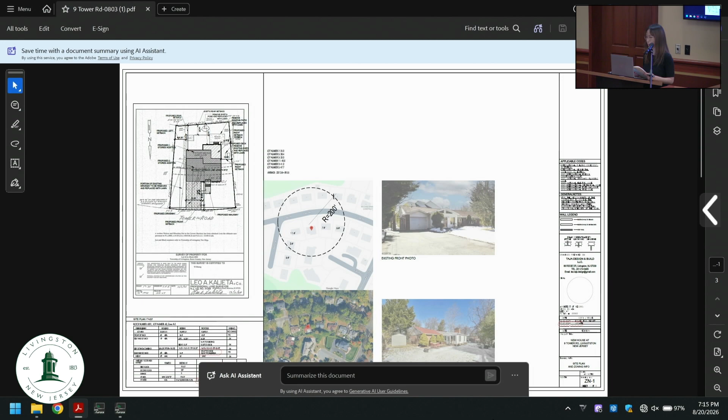Good evening, Chairman and board members. Tonight I'm pleased to present our revised proposal based on comments we received from the board in June. We are seeking a total of 4 variances: 1 habitable floor area ratio variance and 3 setback variances. Let me zoom in to the site survey.

First is the habitable floor area ratio variance. The revised proposal reduces the habitable floor area from 3,548 square feet in June to the current 3,229 square feet. The proposed ratio has been reduced from 32.6% to 29.65%. The massing footprint and deck area have also been reduced in the current design.

The remaining 3 variances relate to the setbacks. First is the front yard setback: required is 60 feet, and we are proposing 40 feet, requiring a variance of 20 feet. Second is the right side yard setback: required is 15 feet. The building itself complies, however the deck is proposed at 13.25 feet, requiring a minor variance of 1.75 feet. This limited relief will allow the owner to let the deck align with the east facade of the house.

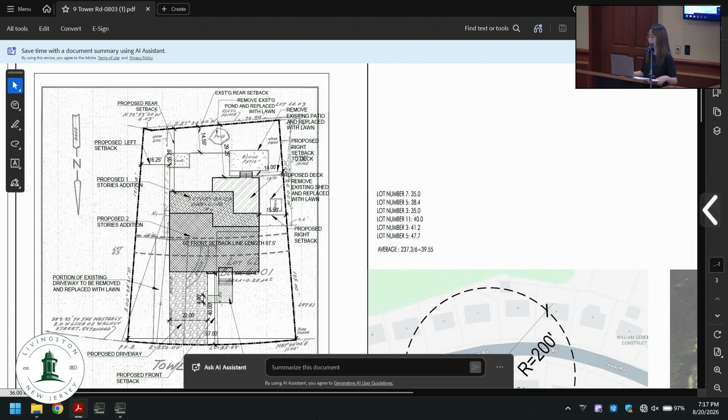Thank you. Does the board have any questions for this witness? Does anybody in the public have any questions for this witness? Does anybody in the public want to make a statement regarding this application?

I'll make a quick statement: thank you very much for taking our suggestions into consideration and redesigning the house. I think this is much better. Thank you. Does anybody have any statements on the board? I'll concur.

Would anybody like to make a motion? I'll make a motion to approve. I'll second. Mr. Sherman? Yes. Ms. Yuan? Yes. Mr. Horn? Yes. Mr. Shah? Yes. Mr. Weissman? Yes. Ms. Khan votes yes. Mr. Beer? Yes. Congratulations, thank you very much.

Thank you, okay, let's call the next application.

Block 1506, Lot 42, 26 Crestview Hill Road, application number 2026-59-V, Rodak Homes Inc. Applicant seeks approval for a new single-family house in violation of the following sections: 170-99C2, front yard setback, 40 feet required, 33.8 feet proposed, 6.2 feet variance requested; 170-87CC4, habitable floor area ratio, 30% allowed, 35% proposed, 5% variance requested.

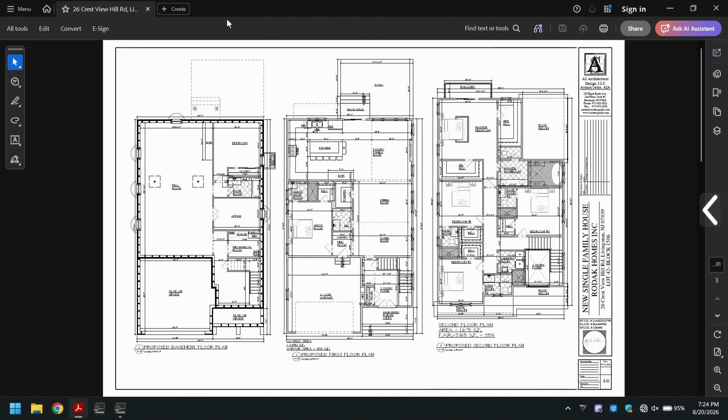Okay, does someone want to make a motion? I'll make a motion to approve. I'll second it.

Mr. Horn? Yes. Mr. Sherman? Yes. Mr. Shah? Yes. Ms. Yuan? Yes. Mr. Weissman? Yes. Ms. Khan votes yes. Mr. Beer? Yes. Thank you for your time. Thank you, board.

Stay dry. I know. It's actually going to be nice. That house needs a change.

Block 7500, Lot 8, 27 Cornell Drive, application number 2026-29-V. Utkarsh Patel, Purvi Sharma, and Srijith N.

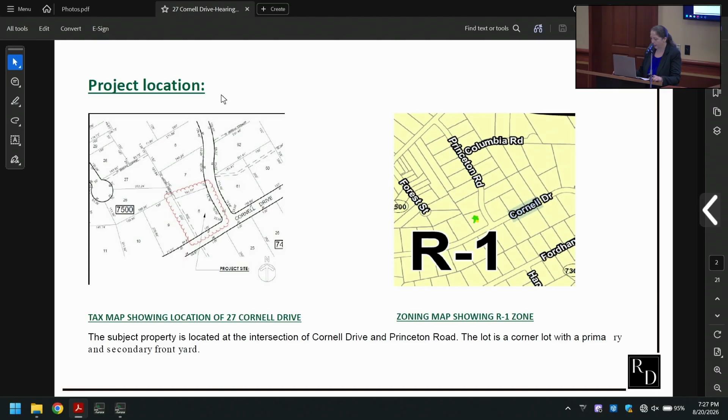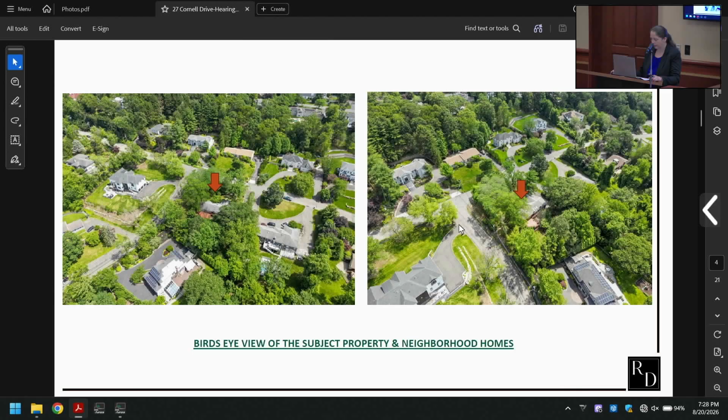This is the tax map showing the location of the site. It's a corner property, R1 zone, at the intersection of Cornell Drive and Princeton Road. You can see where the lot lies, the corner. This shows the aerial view of the neighborhood and the rest of the houses next to the property, and another view showing the location of the site.

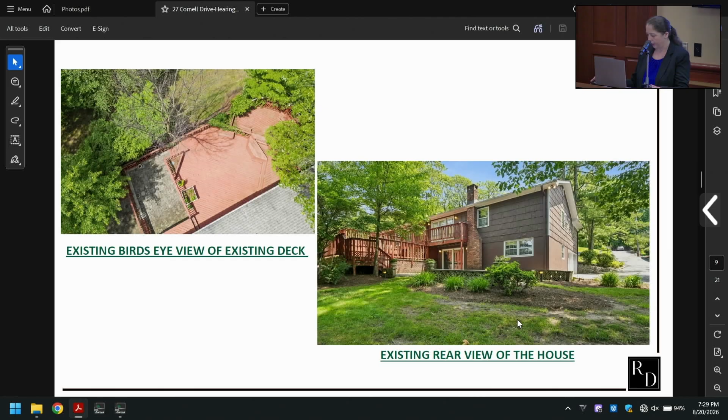The aerial view shows specifically the existing deck, which is about 770 square feet. The rear view of the house shows the deck and the entire existing house with the basement.

We are proposing renovation and addition to the existing single-family house, thereby maintaining the character of the residential use. We're looking to convert this bi-level house into a colonial-style single-family home with a basement.

In the existing house we have a two-car garage. We are retaining that and keeping the basement. We are also adding a one-car garage, which fits well into the neighborhood, since typically the houses there have three-car parking.

We are also including some site improvements: a new driveway, swimming pool in the back, patio, and deck improvements. By deck improvement I mean we're reducing the deck size to about 300 square feet from the earlier huge deck.

I'm going to describe the existing conditions, the physical characteristics of this property. This falls in the R1 zone, which requires a minimum lot area of typically 35,250 square feet, and our site is specifically...

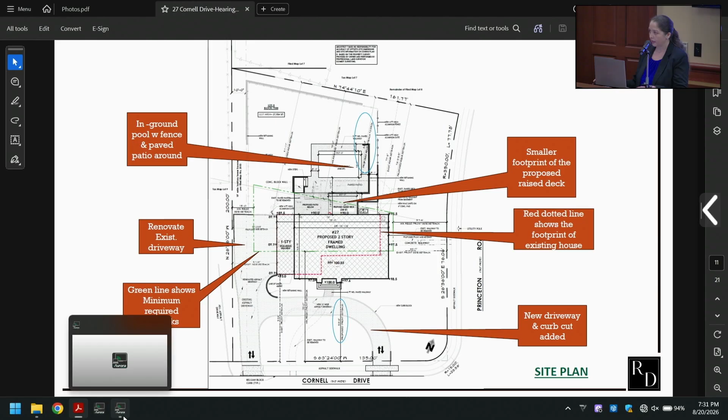The primary setback for a standard lot is 75 feet for the front. The proposed setback we are proposing is 53.5 feet from the front property line, resulting in a variance of 21 feet 6 inches. It's important to note that the existing house was set back at 59.3 feet from the property line,

and this is a pre-existing non-conforming condition. So given the location of the house and the existing site depth, compliance with 75 feet won't be possible without requesting a variance for this side. The other corner, since it's a corner property, the other front yard, we comply with that regulation.

Coming back to the second variance, which is the rear setback variance for the deck, the house complies with the rear setback, which is 75 feet. It's the deck location and the square footage for which we are asking for a variance. The 75 feet setback is required, and the deck is attached to the house.

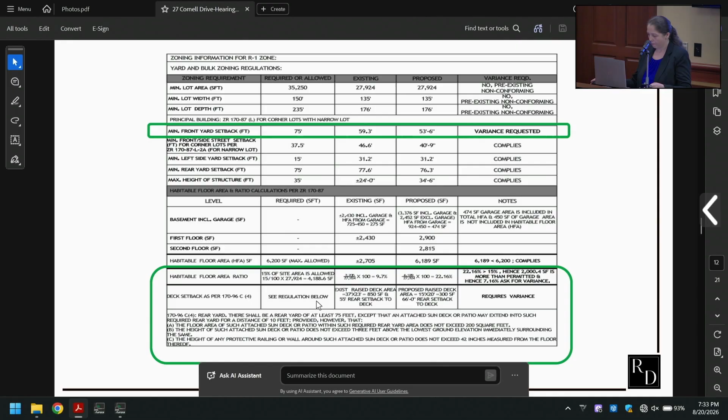Going to the third variance, which is the D variance, habitable floor area ratio. As per the R1 zone, it must be maximum 15%. The proposed habitable area is about 6,189 square feet, for which we are asking for a 7.16% relief, because our percentage is 22.16. The relief is because of the existing lot area, which is an undersized lot, a pre-existing condition, smaller than what a typical lot in the R1 zone would be.

Our HFA, which is habitable floor area, relates to 265 square feet, which is the double height foyer area, and some area from the garage, which is about 475 square feet. So this accounts to about 740 square feet of area which is non-habitable, in the sense that we will not be converting that into a habitable space. The double height foyer is something which will not be used in future to make another room on top.

And if this was a standard lot with 35,250 square feet, we would have gotten the additional square footage with it.

Regarding the other bulk variances, we comply with the height variance, we comply with the left side variance, we comply with the rear yard setback to the house. We also comply with the street setback from Princeton Road, the front setback, and we are under the maximum 35 feet building height. So we are not seeking any bulk variance besides the 3 that I just mentioned.

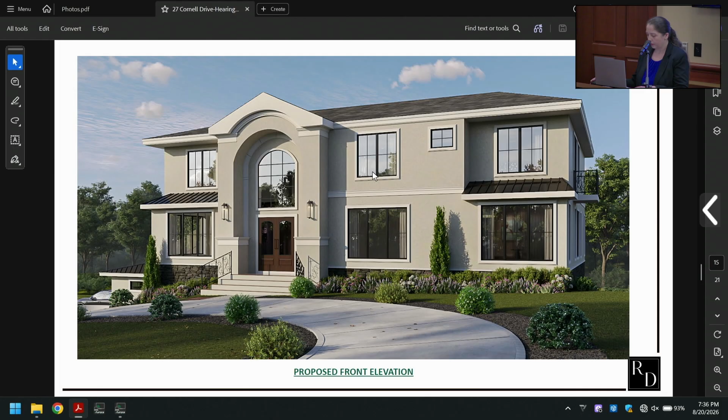So the proposed design provides a better overall result for this property, and it preserves the existing footprint of the house. This is the front view of the house, and this is the back view. We have a pool, an in-ground pool, and a patio around it. These are the side elevations for this house.

Using high-quality materials, this house is going to give a better curb appeal to the neighborhood, and completely fits into the neighborhood of the R1 zone.

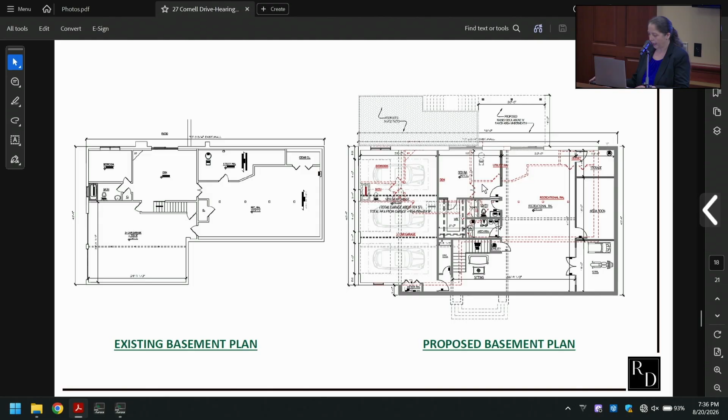These are the floor plans where we show basically what we are doing on every level, the basement level. The first floor has 1 bedroom, 1.5 bathrooms. The second floor has 4 bedrooms and 4 bathrooms.

I don't think there's a negative impact on the neighborhood and to the public good, and this is effectively meeting all the engineering requirements, which our civil engineer would testify and elaborate more on. There's no significant traffic that would be created because of this, and the design of the house well aligns with the neighborhood, and this will create a good visual environment for everyone.

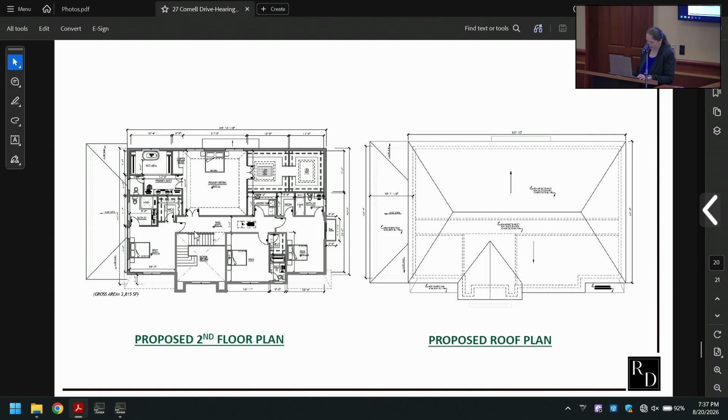In conclusion, I just want to again say that we are requesting 3 variances, which is basically based on the unique characteristics of the site, and the house is carefully designed to make it work and fit well into the neighborhood. Thank you for your time, and I'm happy to answer any questions.

Does anybody on the board have any questions for this witness? Okay, yeah, I have a couple of questions.

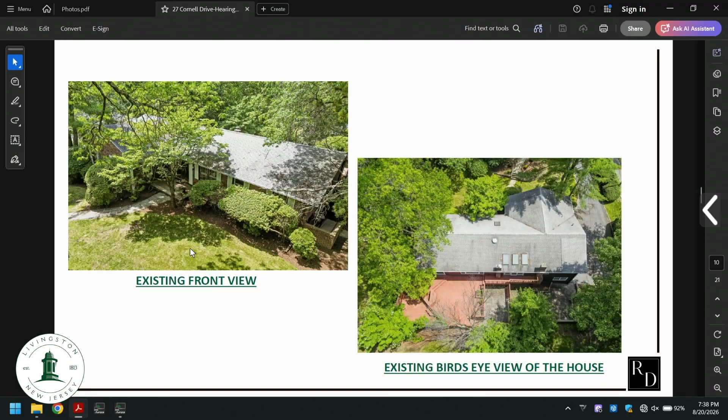I know you had mentioned the existing house is a bi-level house, but looking at the plans, it looks like this is really a ranch, a raised ranch with a basement. It has a basement and a first floor, so... Right, but you walk in on the main level. There's no bi-level where you're walking into stairs to go up or down. So it's really a ranch, not a bi-level. It's more like a... yes, okay. What else?

But we're turning it into a colonial home that's going to fit well into the neighborhood. So, as you mentioned, this is an undersized lot, correct? It's really more in line with an R2, where their standard lot size would be 25,000 square feet.

So I'm having a little difficulty looking at the size of the house on that particular lot. I'm not so sure that it is appropriate for that size lot. It seems like the house is a little bit too large, coming in at almost 2,000 square feet over, where for an R2 the size house would be 4870. So for me, it seems a little large.

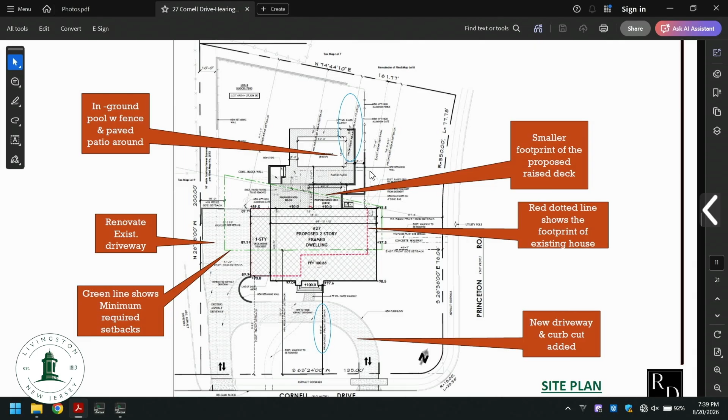So I want to lay importance on the fact that, first, our site is undersized, right? It's a corner site, which kind of forces us to have two setbacks now to deal with, which are front yard setbacks.

Now, in terms of the massing of the house, what we are doing is also keeping the footprint of the house intact. We are doing a little bit of addition in the basement, but the mass for the basement, the existing basement walls, stay in place.

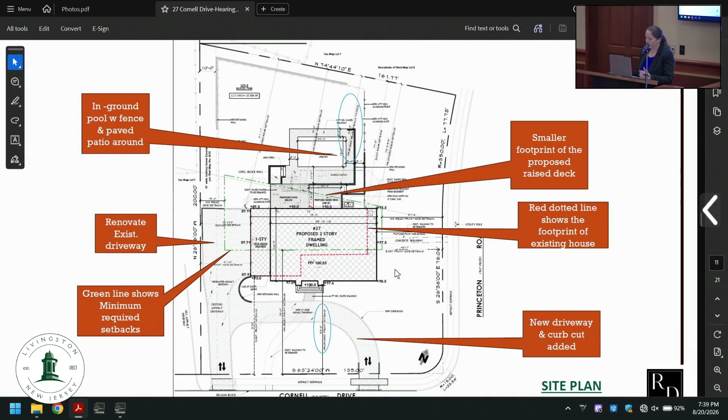So the mass of the building before was the first floor, and the extent of the house is shown as red. We're only extending it out slightly on the ground floor and the basement. And in terms of the second floor, we are setting it back.

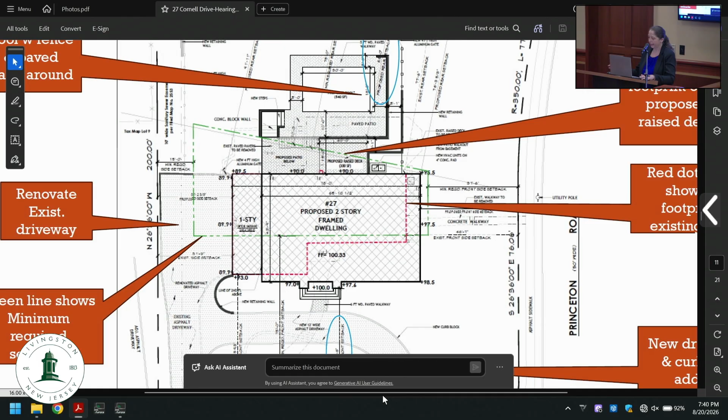If you look at these elevations, in the front, we are setting it back from the street. And two things are important too: in terms of the habitable floor area, we have the double height foyer, and we have the garage area. So those, they get counted.

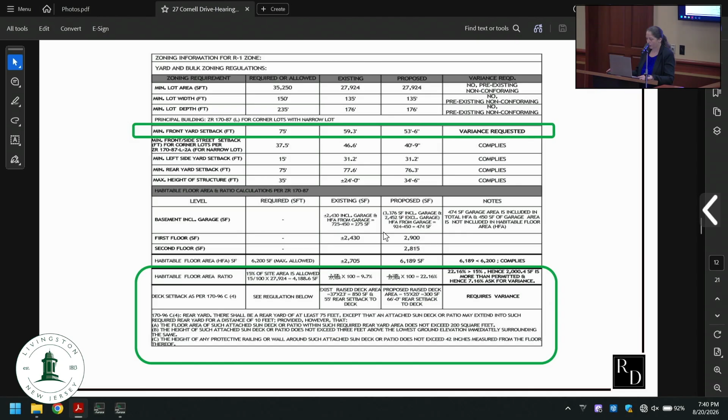Do you have the square footage of the double height foyer? The double height foyer area is about 265. And then the garage area, after we subtract 450, is about 475. So this comes out total to be 740 square feet.

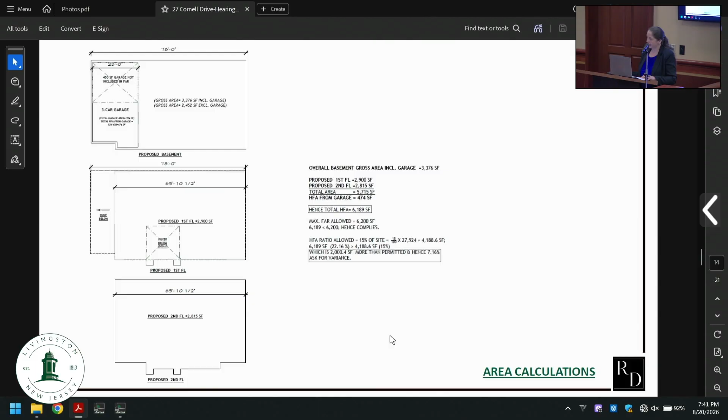And if this was a 35,000 square foot site, we would have already gotten about 5,287 square feet if it was a standard lot. But the issue is that the lot isn't that size, right? So we can't make it bigger—that's the hardship we have. It's not really a hardship, but that's just the size of the lot, yes.

Okay. So yeah, those two areas, they get counted, and they are non-habitable spaces. But that's what the zoning law says, that they are counted, right?

And at the end of the day, I appreciate you continue to go back to an undersized lot, but you're trying to max out the maximum square footage you could put on a 20% undersized lot. And if I do the math, you rightly say about 20% undersized lot, but you're asking for effectively 64% over the habitable square footage. I just think on a 20% undersized lot, you've made no compromises on the size of the house—you're trying to build the maximum house that that zone allows on a 20% smaller lot.

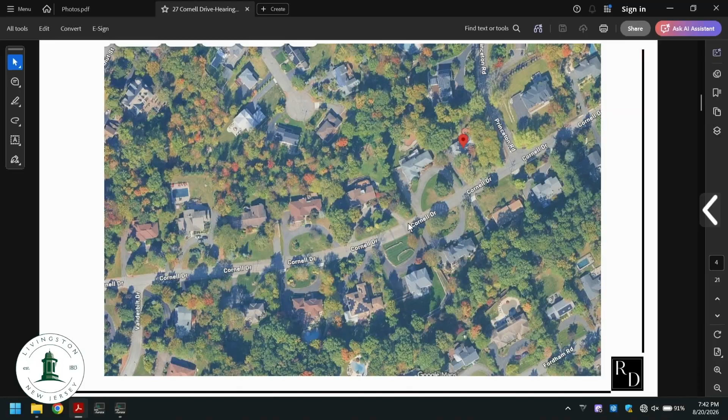It's just too big. I also want to point out that if you look at the neighborhood houses, the way the massing is for all the neighbors, in order to make it fit into the R1 zone, those other houses are also bigger in square footage. But those houses are probably sitting on bigger, standard R1 lot sizes. So let's just look at your house and not the other houses, because when we evaluate houses, we look at everything in a vacuum. We're not looking at other homes. So we're going to look at your lot and your issues, okay?

The other thing that I have, you're saying that the basement walls are staying, but could you go to that drawing, the first sheet that's got the red lines? Yeah, that one. So the red dashed line is the existing house, correct?

Yeah. Okay, so I know the basement walls are staying, but in essence you're blowing out the whole front of this house, so it comes out that much further. Three-quarters of it comes out way further than before. You're coming out even further on the side yard too, and it's already a corner lot, so you're already intruding further on the side because you're coming out on the side as well.

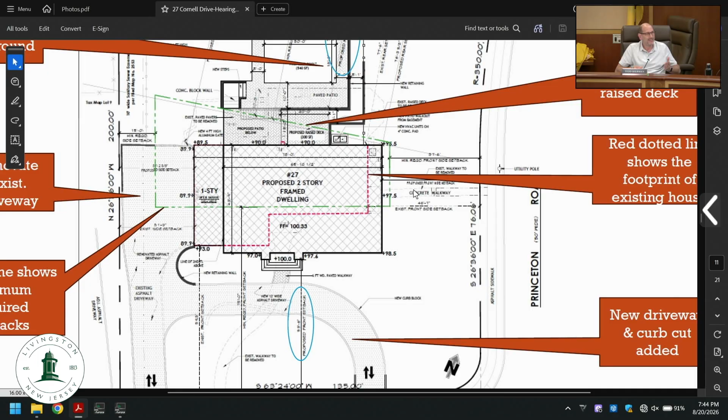This is what we mean when we say the house is too big for the lot. I get the rear lot line affecting the deck and the rear yard setback, that doesn't concern me, but the size of the home is way too large. And I know we look at everything in a vacuum, but if you look at the other house on the other corner, number 31, it could be as large as what you're proposing, but that lot is so much bigger than yours.

And it's a squared off lot, and it could handle that size home without looking large on the lot. If you look at your house the way it is today, even before you did this, it looks oversized for the lot, and now you're planning to make it that much bigger and pull it that much further to the street, and your house is already one of the closest to the street. So now you're pulling it even further, while every other house is set back way further on that street.

Yeah, and to that point, I would say that the front setback to Princeton Road, we are compliant with that. So we are not asking for a variance on that side. And if you look at the front, it was already non-compliant. All we added was a little bit of an extension to the house, giving better curb appeal that makes this house fit into the neighborhood.

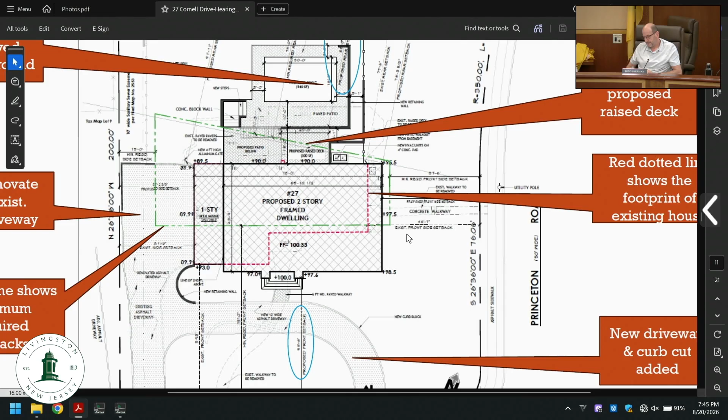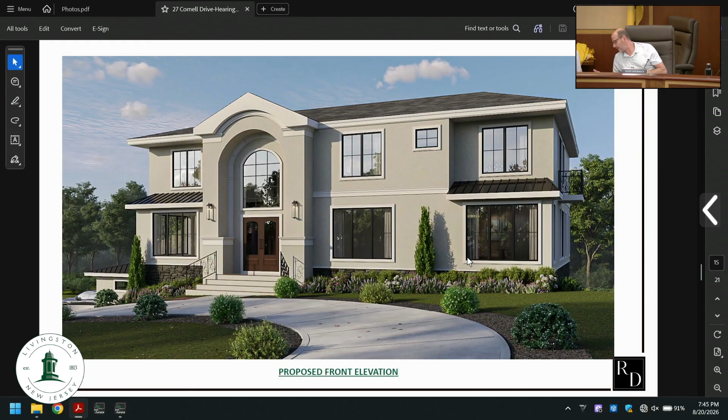And you can see how the house looks now compared to before, we are making this fit into the right neighborhood where bigger houses are. So I don't dispute the house is beautiful. And if you had a full-size lot, either you wouldn't be here, or maybe you'd be here for something minor, right? So this isn't a criticism of the design at all.

I know that area very well. But the challenge is, you have a 20% undersized lot that you're trying to max the building space on. You're already, as you rightly say, closer to the road, you have a pre-existing condition, and you're bringing it even further to the road. I think what you're hearing from the board is a hesitancy from all of us that the house is simply too big for the lot that you have.

So it's up to you guys. Maybe you want to confer with your owners, or maybe you want to ask for an extension to come back with a proposal that you think we might accept, but you're hearing the tone from the board. So maybe you want to consult with your client for a moment?

Sure, and I want to ask one thing. If we line it up with the existing house where the red line is, would that make a difference? I'd have to see how the square footage comes out, et cetera. Like I said, you're on a 20% undersized lot. You're going right to the max of the square footage, and from a habitable square footage standpoint, you're asking for a 64% variance. You're just going too big for the lot as it is right now.

So I would need to see, for myself personally, a significant reduction to get comfortable that the house fits the property you own. I just want to make sure, the habitable floor area ratio we're asking for is 7.16%... when you do the math, in terms of the... exactly, so it should be 18%. But sorry, so right now we are... sorry, yeah, 15%, it's still too big. 22%. But you're on a 20% undersized lot.

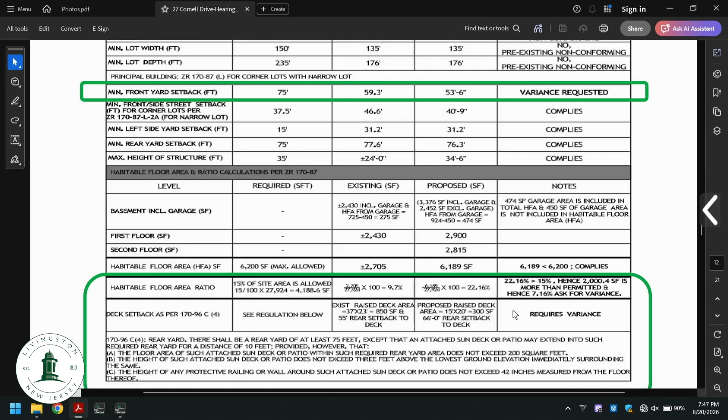You're correct, sorry, you're absolutely correct on the habitable square footage. When you have a 20% undersized lot, and you're maxing out to basically the max that you can, as my colleague said, the size of this lot is much closer to an R2, which would be a roughly 4,800 square foot house. It's just too big for the lot.

I'll just add, I do agree with all my colleagues. You do have this pre-existing condition. Generally, we find when there's a pre-existing condition, it doesn't get worse, or they try to make it better. So I think that's part of the hesitation from the board, that it's being exacerbated as opposed to made worse instead of better. So why don't you confer for a second, we'll take a break for you. Two seconds.

So I just had the discussion. We would like to come back, but before we come back, I would like to know your thoughts in terms of the square footage - what you think is the ideal for this size of the property. That's really difficult for us to say. It goes to the whole design, how it fits and everything else. We really can't design on the fly at the board. We'd love to say, hey, there's a number and go hit it. We just really can't do that, and we really shouldn't do that. So I'd have to defer from doing that. Sorry, I would, but it just doesn't work out well.

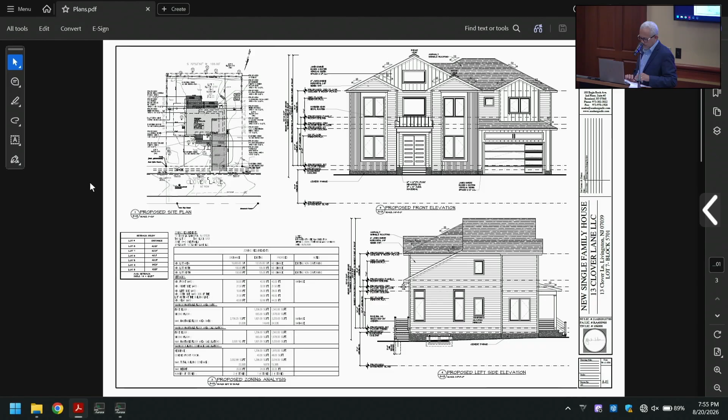Mr. Sedra, I think Mr. Horn just pointed out to me, I think you have a typo. Mr. Beer was looking at it as well. On your zoning table, under maximum habitable floor area ratio, you have first, second floor numbers, and then you mark it as variance, and then where you have the percentage, you mark it as variance too. I think you just probably had a typo there. There's only one variance for the habitable.

Yeah, it's just one variance for the ratio, correct. The number itself, you meet, the home is at or below the actual habitable floor area, just for the record. That's correct, the next line actually. Right, so it's just a typo. We did show it in a separate way, but yeah, I agree with you. I think the variance word should be removed from the square footage in one. So in the resolution compliance, you'll make sure that's all taken care of. Yes, thank you, we can do that.

Okay, does anyone on the board have any questions for this witness? No, I have a statement. I just think we need for the record, because you're looking for a D4, that you think this lot, this property can accommodate this size house. Of course, the property, this house is well suited for this size property. Correct, yes. It fits in this neighborhood.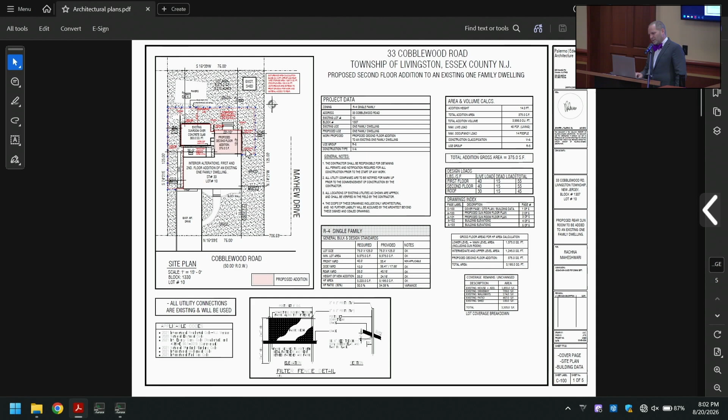Just to move on to the site plan here: this shaded area is where we're putting the addition, on the back of the building. I do want to walk through this first floor plan — we're not doing any work here, it's all garage and living space.

So I'm going to skip that and go to the upper level plan, where we have this shaded area in the back corner. This is the new bedroom area, a total of 20 feet 10 inches by 18 feet, again totally over an existing first floor.

We are combining this space with what was an existing small bathroom and small bedroom to create a new master suite with a larger bathroom with 2 walk-in closets, and then the 1 bedroom. So the important thing here is we're not actually adding a bedroom, and we're not actually adding a bathroom — those counts stay exactly the same. We're just turning it into a nicer bathroom and a nicer bedroom.

Also, I mentioned there's no basement in this space. The attic is also very small — as you'll see with the elevations, it's a very low roof pitch, so there's not a lot of storage space up there. So there's very limited storage in this house, and the walk-in closets will be a great benefit for the homeowner.

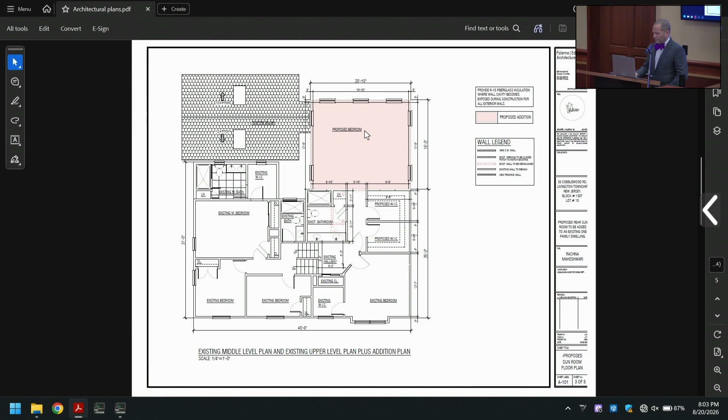Lastly, I have the elevations. Again, the shaded area is what's new. We did a pretty nice job fitting it into the house and also not increasing the building height at all. All the finishes are going to match what's existing on the building now.

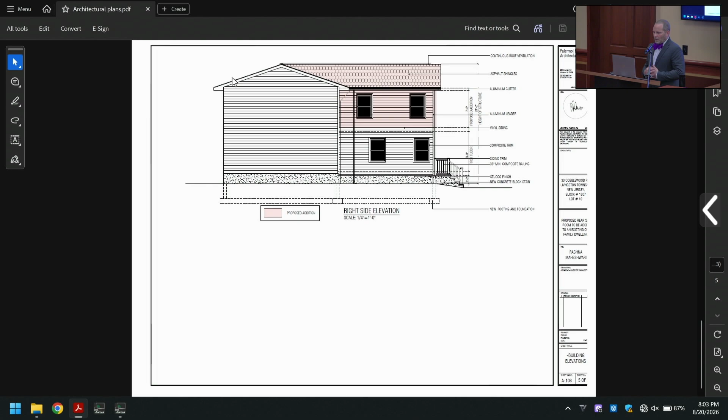That includes the fascias, the shingles, the siding, the windows, and the window trim. The last thing I want to bring everyone's attention to is the right side elevation, the back of the house. It's something you can't even see from the street, so we don't think this has a negative effect on the neighborhood itself. With that, I can answer any questions you have.

Does anybody on the board have any questions regarding this witness?

I just have sort of a math question. Your lot is 9,375, that's what your lot is. You said it was undersized, but it's not? No, we're a conforming lot. And your habitable floor area is 3,195.

Correct, so you're 5 feet under the required. I think it was 3,200 that was allowed here. Am I wrong on that? Right, so it's 3,220, we're 25 square feet under. So you're way under. Yes. Okay, so why are you here?

Because we have a variance over on the floor area ratio. Okay, ratio, okay. But thank you, I know our numbers weren't right.

Does anybody else on the board have any questions for this witness? Does anybody in the public have any questions for this witness? Would anybody in the public like to make a statement regarding this application? Would anybody on the board like to make a statement?

I'll make a statement. I think you did a very nice job of fitting this into the existing house and keeping it, I think it's a great addition. Does anybody else have any statements?

Would someone like to make a motion? I'll make the motion. I'll second his motion. Mr. Horn? Yes. Mr. Sherman? Yes. Mr. Shah? Yes. Ms. Yuan? Yes. Mr. Weissman? Yes. Ms. Khan votes yes. Mr. Beer? Yes. Congratulations, thank you so much everyone.

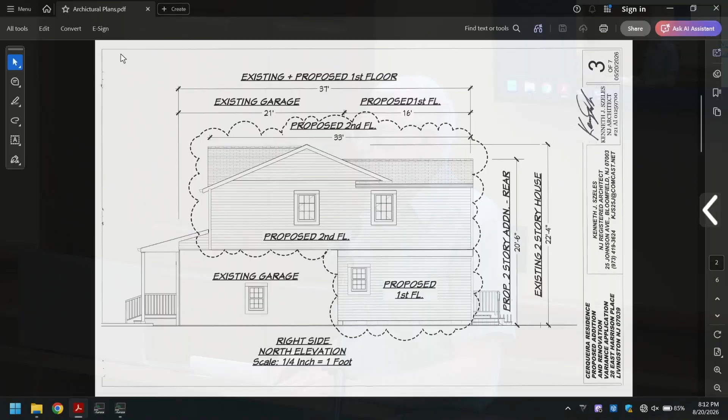And again, it's important to keep that 5-foot distance off the property line, that's basic fire code. So you're keeping the garage, which was the originally defining point at 6.4, you're keeping that level, it's only the overhang that is projecting the extra 1.4 feet that you're asking for. The 1.4 feet is on top of the garage, on the second floor.

Does anybody have any questions on the board for this witness?

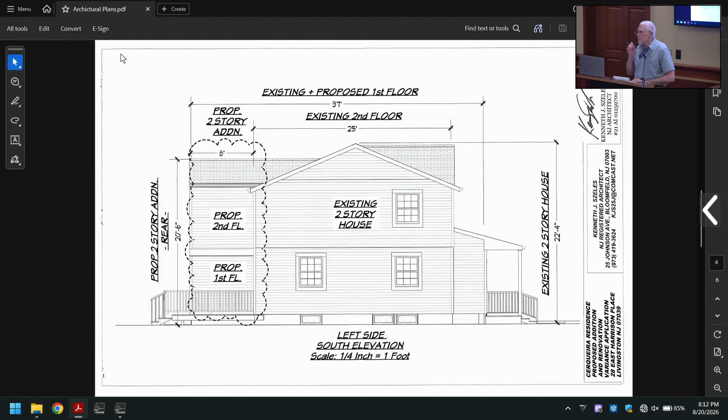Yeah, I do, like two questions. Part of the issue is I don't view the 5 feet as just a fire issue, because the law says 10 feet, and I think it's to have space between neighbors. I do want the applicant to get everything they want in terms of a bigger house, I think that sounds great, but I'm concerned about the neighboring property. So my two questions are: one, have you looked at the other houses in the neighborhood? Are there any other structures, across the street or next to you, that close to the property line, meaning where you propose the cantilever to go over? And two, is there another design? I see the bedrooms, I know they're narrow, but it's a narrow lot. Is there another design where it could be 10 feet and then go back? You've got a lot of room in the back—again, I'm not designing, but my point is there could be an alternative that doesn't affect the neighbors as much, because it will affect the neighbors, since they're expecting 10 feet. And I get that they're already living with it going into that, so those are my two questions.

Yeah, if you want to answer that, he's pretty familiar with the neighborhood.

Sir, we need to swear you in. Do you swear to tell the truth for the zoning board tonight? Yes. All right, can you state and spell your name for the record? Jeffrey Cerqueira.

Cerqueira. Go ahead. As far as the street, they all look—I think my house and maybe one more, it's a small block, but my house and maybe one more look identical right now with that space that's missing.

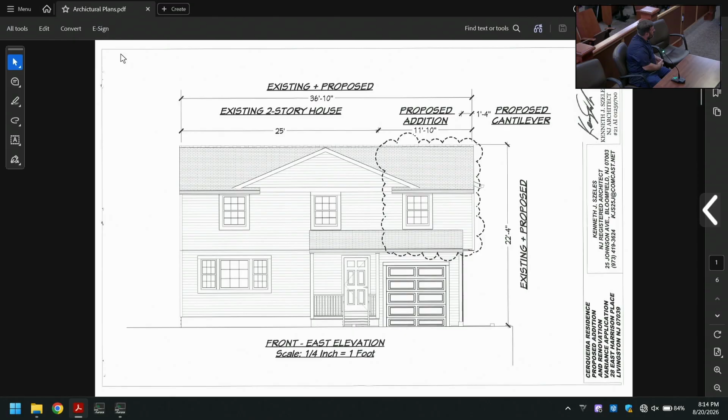No, I think just going by the law, it really just deals with structures, because in my opinion of why the law is drafted, it's about how close to the next structure, if somebody's looking out their window. So the path, to me, really doesn't count, because people could put pavers down, or a path, right up to the line. And for the fence, people could do fences all the way, I believe, to within 4 inches of the property line. So it's really about the structures and what the neighbors are looking out into, either from their windows or from their property, because there is an expectation, since that's what the law requires, the 10 feet. I haven't measured property to property.

Let me just say for clarification, typically, even though you would need a variance if you just went straight up, that is usually, almost all the time, granted just going straight up. Even though it's technically a violation, it's usually an easy thing, because the neighbor's been living with that for a long time, and you're just going up. Or if you were just going back, which you are here as well. Both of those two things tend to get a variance. Here, we're not just doing that, but we're also getting further over to the neighboring property. And combined with that, you have a lot of room in the back. That's why I was hoping that something could be done so that everybody, meaning the neighbors, would be happy as well.

I did provide some photographs. They should be in your documents. They're not on the screen here. But there is one particular photograph that shows the neighbor's property. That's right, there it is, in relationship to our proposal, or to the existing house, actually. Try it again. No.

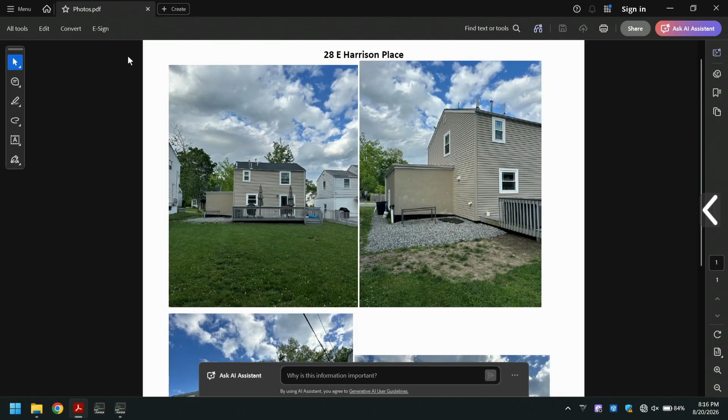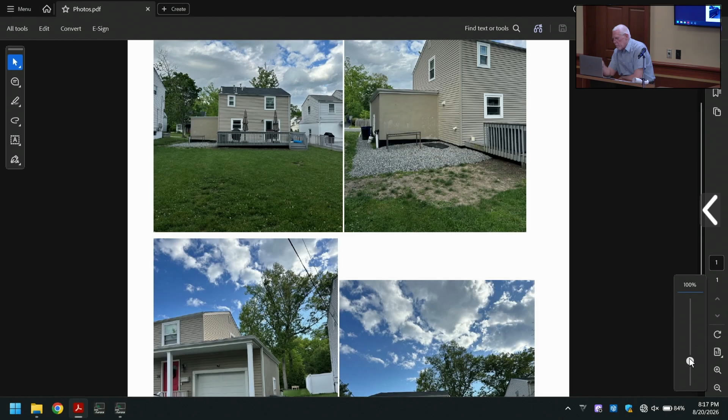One of the photographs that I provided, let's see. I'm not the best for this. That one is one where you can see that the property line is to the right of the lawn there. You can't really see the adjacent house except in this picture, the bottom one there. No, we're not having a... Yeah, the adjacent house is pretty much off. There you go, okay.

That one is a good one. Where you have a lot of lawn there to the right side of the garage. And then the other picture shows where the neighbor's house is, and again, it's not that close. Their setback is a good bit onto their property. And I think there are a couple of other pictures there too.

I think they're all kind of a little tight on the street, though. There's not a lot of elbow room. My point in general is that a lot of the houses were built pre-zoning, not with adequate, not the 10-foot setbacks that are required now. I mean, that's part of the neighborhood.

I don't think that... Anybody else have any questions? Well, can I make a comment? There's not too much difference between this house and the adjacent houses, or even the houses across the street, really, as far as their location on the property line, which is a little bit narrow.

Does anybody else on the board have any questions for this witness? Does anybody in the public have any questions for this witness? Does anybody in the public want to make any statements? Does anybody on the board want to make any statements?

There you go. So it is a modest addition, right? The square footage that you're allowed in that zone is 3220, and I believe you're coming in at 1,800. So it is a modest addition. I actually think the 1-foot overhang that's cantilevered makes the house look a little bit more interesting. It's not just like a big box.

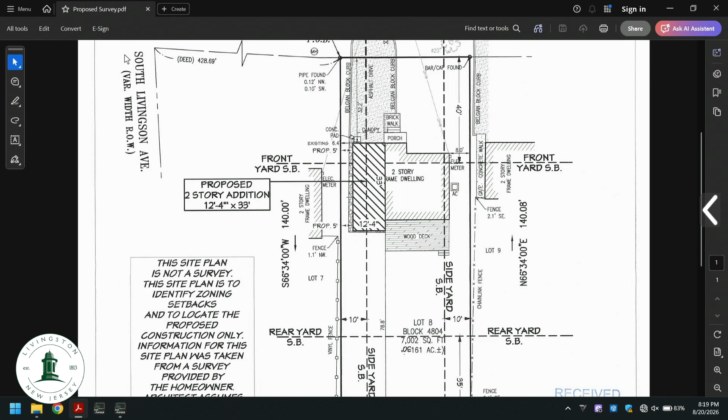Thank you. Does anybody else on the board want to make comments? I concur. I think you made it modest, as my colleague says. I think you're pushing the boundaries on the side, and if we thought you were being too piggish, but this allows you to go from a 10-foot wide bedroom to 11 foot 4 inches. While your kids might be coming out of toddlerhood now, I understand they'll take more space as they get older, so I appreciate you trying to do the right thing to extend your time in the town, and you did the minimum to make sufficient bedrooms for your children. I wish you a lot of luck.

Thank you. You'll need a bigger refrigerator too, at one point. That proposed storage might be for the food.

Does anybody want to make a motion? I'll make a motion to approve. I'll second it. You're never fast enough.

Mr. Sherman? Mr. Horn. You did that twice. Did you make the motion? You're all over the place tonight.

Yes. Mr. Horn? Yes. Mr. Sherman? Yes. Mr. Shah? Yes. Ms. Yuan? Yes. Mr. Weissman? Yeah, and even though I'm not happy about how close, but the fact that no neighbors have come forth, combined with it's only 50 foot and you got to fit something on, I'm also approving. Is that yes? Yes, yes. Little commentary, Ms. Khan votes yes. Mr. Beer? Yes. Okay, congratulations.

Thank you. Thank you.

All right, let's go to the next one.

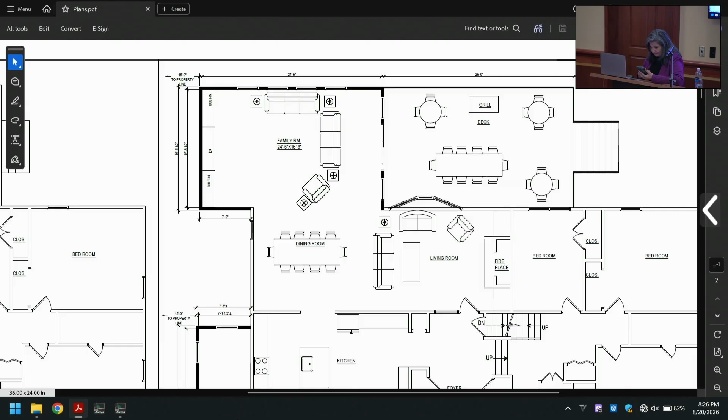the existing deck was actually at, let me just read these numbers off. The deck was at 72.6, so while doing the family room exactly at the same location, it generated a 2.4 feet variance for the back setback.

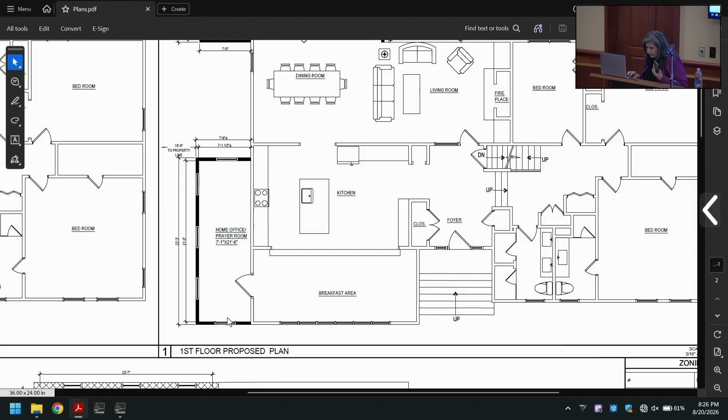The front, the homeowner wanted an office on this floor because they work from home most of the time, and just perhaps having the children after school and all, it really helps to have an office on the same floor. So we are aligning with the front yard, front of the house, and providing an office slash prayer room, which is going to be subdivided into a prayer room and an office on one side.

We are not encroaching into the front yard. We are aligning the expansion on the side with the front yard. However, I understand that does still require a variance - the existing front yard required is 75 feet, and the existing is 74.4, so we are requesting a 0.6 feet variance so that we can align the expansion with the house, and we are not really encroaching into the existing non-compliant front yard setback.

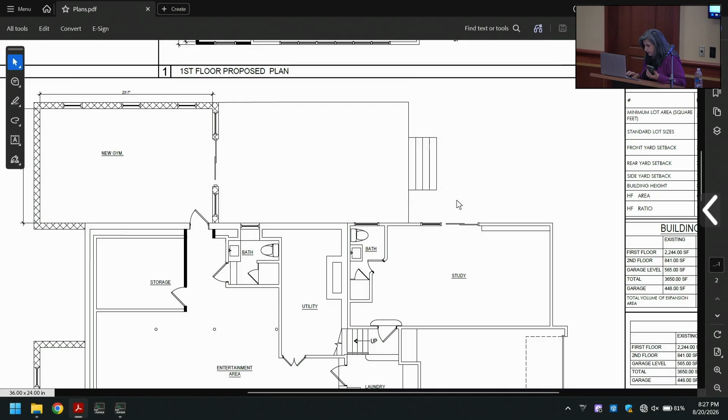Now let me go over the bulk requirements. We have a considerably undersized lot as compared to what is required in this zone. It's more like an R2 zone lot rather than an R1 lot. So that is generating a little bit of overage on the habitable floor area ratio, and it's only 1.74% that we are requesting. If the lot was a regular size as required in this zone, we would have been way under the required 15%.

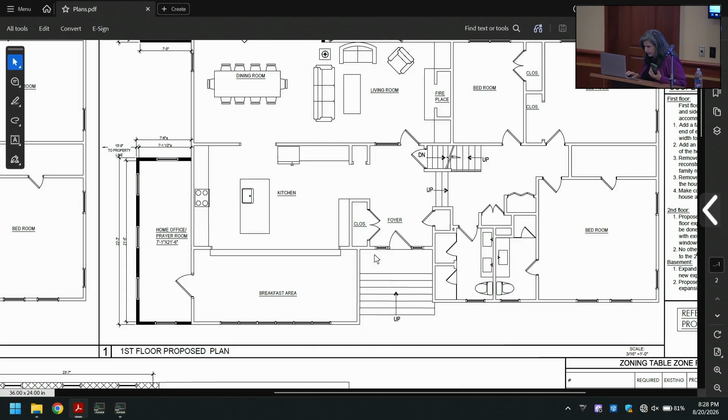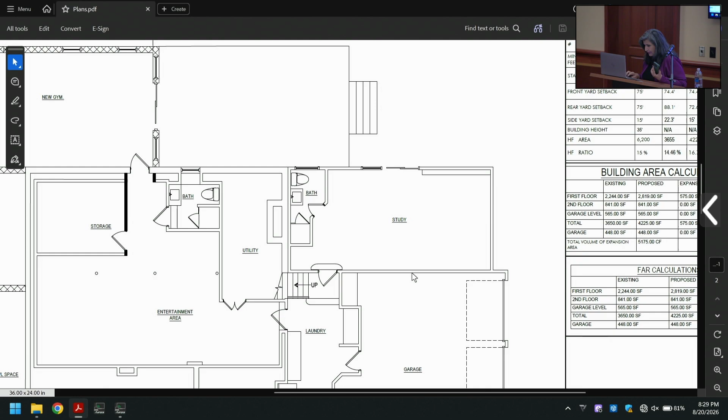And since some of the areas on the garage level are oversized but not very usable for the family - this study and the garage are on the grade level, and therefore being included in the floor area ratio. If it was in the basement level it would have been easier, but it's being included. Including all those areas, we are requesting only about a 1.74% floor area ratio variance, a relief of 1.74%.

And I would be happy to answer any questions that you may have. And we have the homeowner here. If you have any questions for them, you could probably ask them.

So you're essentially replacing the decks with some building? Exactly, with a little bit of, pretty close. We're modifying the deck also a little bit, but we are not encroaching more than the deck in the backyard. Right, it's right there. And you're matching the front yard, which is really very de minimis overage anyway - 0.6 feet only. Does anybody have any questions for this witness?

Does anybody in the public have any questions for this witness? Does anybody in the public want to make any statements regarding this application? Does anybody in the board want to make any statements regarding this application?

I'll just make a comment. I very much appreciate it, right? You outrightly say you have an undersized lot for the zone. You're really more in an R2 size zone, and even in that, your square footage is still under what you could be, so I appreciate you not trying to go for the maximum rung that you can in the modest addition to accommodate your family, and we appreciate when you take that into account, so thank you.

Someone on the board want to make a motion? I'll make a motion. I'll second it. All right, there you go. Just for a change, okay.

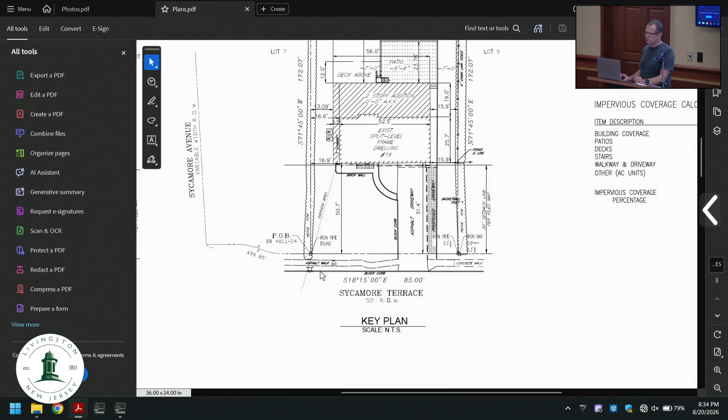So it was an existing split-level house, and the proposal is to add on the back side an additional 2-story addition, and from the left side it's 3 feet, just to fit and plan the correct layout. It's just minimum, we need to reduce the amount of space, just 3.5 feet.

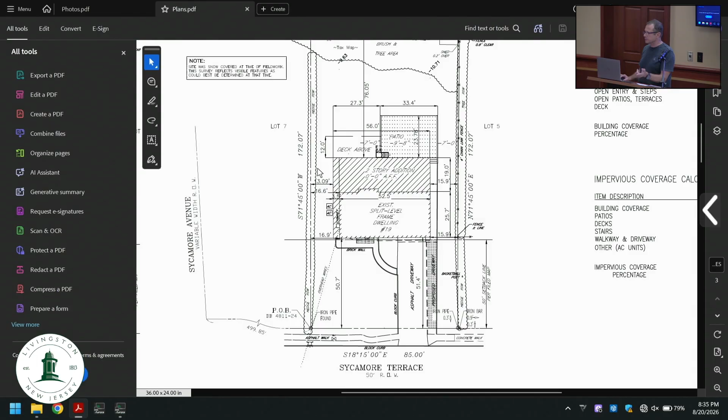If you see on the house, we keep the same foundation, we keep the basement, we keep the garage, so we add the first floor up 1 foot, and after that additional second floor fully changes. From the planning perspective you can see the first floor, it still keeps the same garage. We added 2 rooms, 1 office, 1 dining room, a great room, kitchen, and guest room.

This is the first floor. The second floor is just 4 bedrooms on the second floor. That's actually a normal house for this neighborhood, it fits exactly with 4-5 houses in this area.

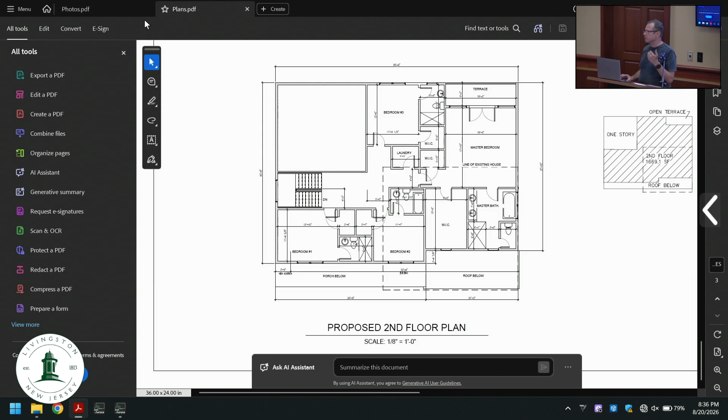Exactly, you can see on the photo, it's the same houses we have in the neighborhood, same size, same houses. Sycamore 21, Sycamore 23, Sycamore 25, Sycamore 22, same houses, even Browning 10 on the back side of this house, it's the same size of the houses.

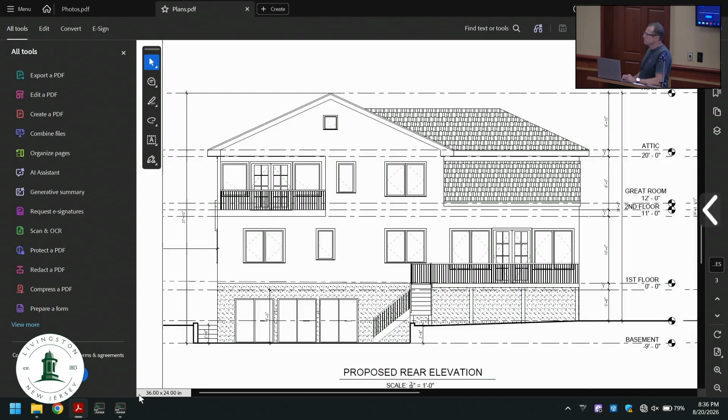I have a question, I'm just trying to get my head around this. So it's currently a split. It's not that you're just putting an addition on, you're actually effectively reconstructing the first and second floors to make it a colonial, as opposed to sometimes you see just people adding on.

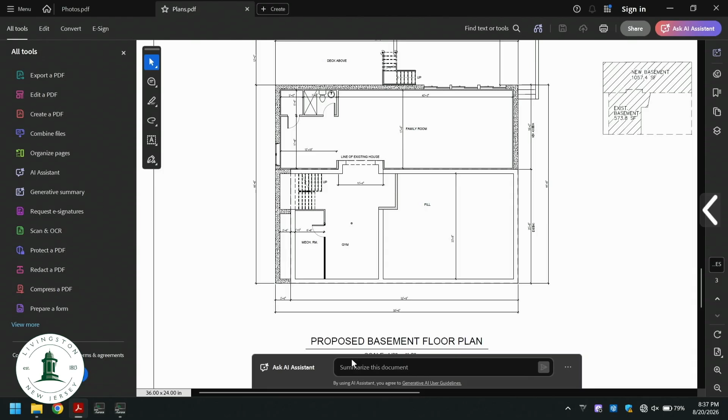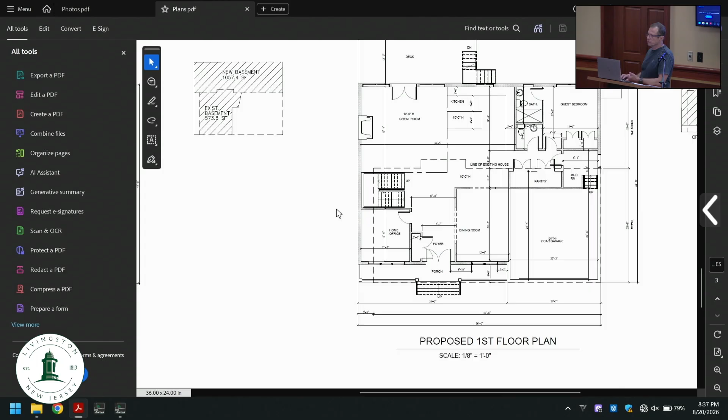Let me show this point. It's a little bit of windows, it's not- okay, so second, first floor, let me find first floor. So you see this line, existing floor, this dash line, it's the existing house. So I'm getting up 1 foot for this area. So the garage is still on the down level, and all the house starts from this floor on the first floor, and the second floor above.

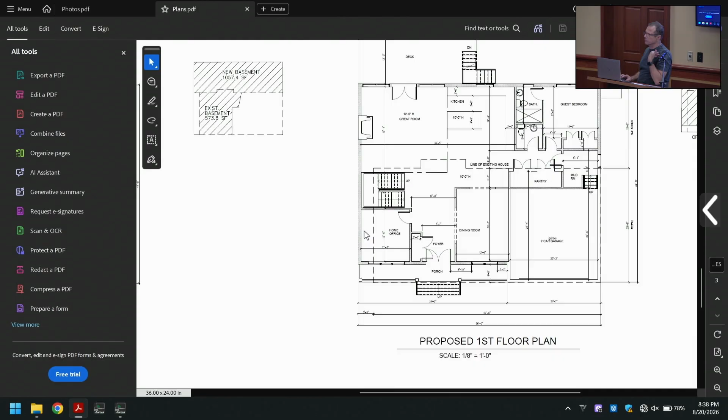That's all. Okay, so you're reconstructing the first floor to kind of flatten it out from a split, and then putting a second floor, turning a split effectively into a traditional colonial. Just allow me to do this. I got you, thank you very much.

I have a question. On the second floor, outside of the master bedroom, you have a little balcony terrace, right? Yes. Is there any plan to enclose it into the room? No, just sitting. Would you make that a condition once it's approved, that the balcony will stay as a balcony, not wrapped around and made into part of a room? No. Okay.

You can talk, you just have to come up and be sworn in. I just have a question about the roof height, it looks like at the peak of the roof it's 8 feet 10 inches. At the top, yeah, it's the peak of the roof, counting on a base of 4 points, so on that base we have 34 feet. Wait, I'm sorry, I'm not understanding, so the attic height is almost 9 feet, that's what I'm seeing here, 8 feet 10 inches is the roof height.

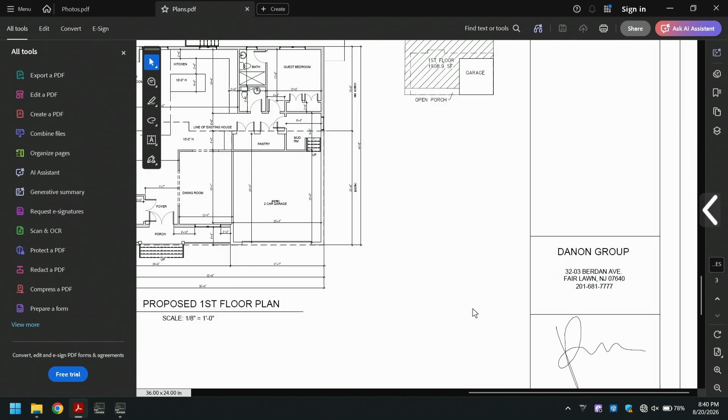See the number on the right, it says 810, that's the roof height. On the right... I'm on page A2. Elevation, page A2. Sir, if you go, I just want to make sure you're looking at the same thing. So go over to sheet A2. Top left. It's diagram A3, okay, A2, A1.

This one? There's a window too. It just has a... okay. Do you see that? Scroll up a little bit. Yep. Okay, and it's 8, you see where it says 810?

To the uppermost peak of the attic, right in between attic and roof. And there's a window there. How do you access that space? It just, downstairs, it's not a living area, just attic, that's all.

So that could also be a condition of approval, that it does not become living space. We'll just make that a condition of approval, that it does not become living space, right? It's just attic without access. It's aesthetic, normal. It's a stair, that's all.

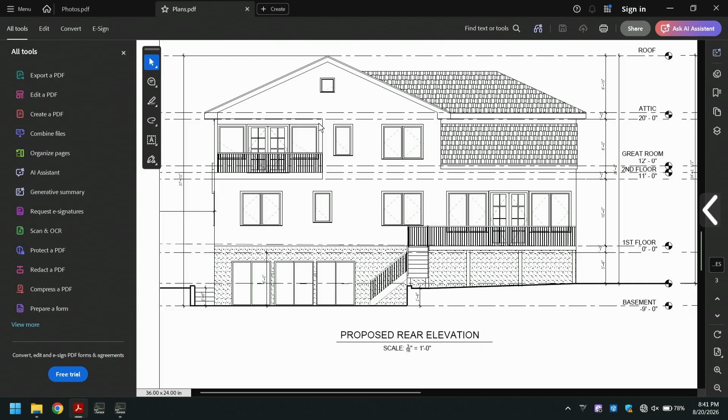Question on the family room. Is that a double height, or does it say 12? What's the height? I'm trying to figure, 12, it's not double, it's 12 feet? Okay, so that's exactly one of the questions I had with zoning, right, for counting 12 feet to avoid double counting.

And it looks like also in the front entrance, there's no double counting, no second. Right, so there's no double counting. Correct.

So, Mr. Kaplan, let me just cover a couple of things so the record is complete. You're asking for 2 variances. Correct. The first variance you're asking for is habitable floor area. In the R3 zone, 3,520 square feet is allowed, 3,578 square feet is proposed.

Correct, so you're over by 58 square feet. Now, is the reason for that because of a particular foundation? It was difficult to make the layout work to get to this footage, that's the reason. So what you're saying is you're going over because it's a better design alternative, to make the house look correct in terms of how you're designing it, changing it from a split level to a colonial, which fits in with the character of the neighborhood.

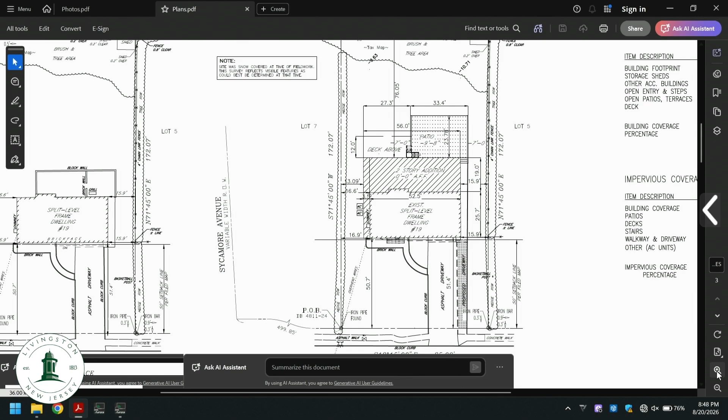So I heard Mr. Weissman say you need 10 feet. Let me show you - okay, so what Mr. Kaplan's going to put up may be helpful. Can you show the part of the survey with the addition? So we have the distance from the line, 13 feet, which is 3 feet moving. So, sir, you're the next-door neighbor? Yes. Are you on the left side of the house or the right side? Facing the house, we're to the left.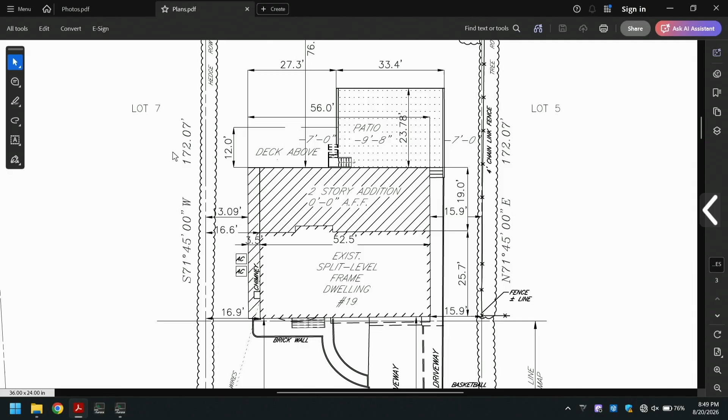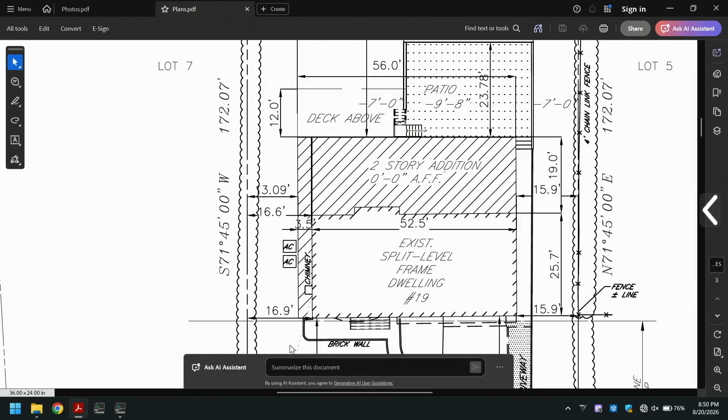Okay, so when you look at that, you'll see there's a hash mark for the addition. The majority of the addition is to the rear, and then there's a slight addition to the left going towards your house. But he's still within the setback requirements, so he's getting approximately 3 feet closer. He's supposed to be 10 feet away. He's going from 16.6 at the rear to 13.09. What about 13 on the left side?

That's on the left side, correct. It'll be about 3.5 feet closer to the property line, but he has to be 10 feet away without having a variance, so he's within allowance. So the current distance is 16 and a half? 16.6, 16.9 in the front, 16.6 in the back - it's a little wacky. You just gotta go by the line. So he's fully within the allowed distance? Yes, otherwise he would need a variance for that.

He does not have a variance for that - he has a variance for the area and the area ratio. So this is not an application for a variance there? Correct, no, it's just footage. There's no question. Thank you. While you're here, do you have any comments you'd like to make? Because that's the next part. Thank you so much.

Does anyone on the board want to make any comments regarding this application? Does anybody want to make a motion? I'll go for it. I will second it, my next door neighbor. Mr. Shaw, yes. Mr. Horn, yes. Subject to the conditions we discussed, which are - pull down stairs where the attic would be pulled down, not livable space.